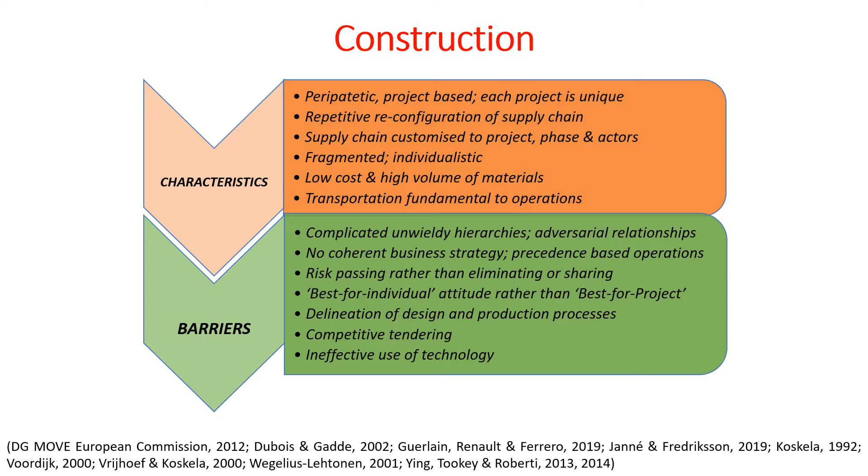The barriers to sector transformation are complicated and unwieldy hierarchies, leading to adversarial relationships, lack of a coherent business strategy, operations being precedence based, the tendency to pass risk rather than eliminate or share it, best-for-individual attitude rather than best-for-project attitude, delineation of the design and production processes, highly competitive tendering, and scarce use of technology. The New Zealand construction sector is isolated from the rest of the world owing to its peculiar geographical location.

It responds comparatively slowly to improved philosophy, resulting in delayed introduction of new ideas. This typically lags UK initiatives by about 8 years. In turn, new initiatives to upgrade construction have major knowledge, understanding, and skills deficits. Its productivity compared to peer domains has not been very encouraging over the last about 30 years.

In April 2019, the Construction Sector Accord was launched between the government and industry leaders, creating a platform for them to work together to meet some of the key challenges, including skills and labor shortages, unclear regulations, lack of coordinated leadership, uncertain pipeline of work, and a culture of shifting risk.

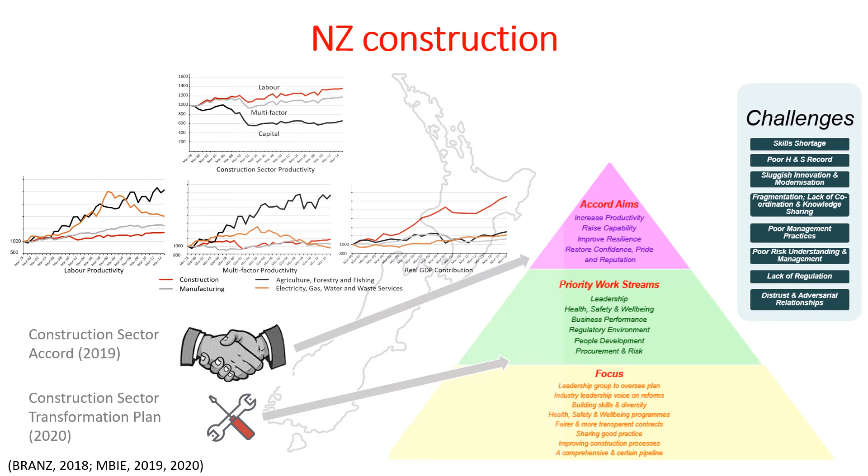This was followed up by a 3-year construction sector transformation plan during January 2020, a blueprint for resolving the sector's long term challenges around risk, overly complex contracts, and skills development.

Construction supply chain management is a system where actors work together to install and utilize information to produce and deliver materials, plant, temporary works, equipment, labor, and other resources for construction projects. It primarily consists of owner, user, architect, consultants, and direct and indirect suppliers or contractors, and focuses on managing the interface between the supply chain and the site, managing the supply chain, transferring activities from the site to the supply chain, and integrated management of both.

It has key considerations ranging from data processing to understanding financial trade-offs at the other end of the spectrum. It is achieved at the operational level through an equitable relationship between actors, whereas at the strategic level, it is based on power relationships.

Logistics plans, implements, and controls the forward and reverse flow and storage of goods, services, and related information between the point of origin and the point of consumption. It is considered a subset of supply chain management, though there are varying opinions. Construction logistics consist of whole projects, supply, and on-site logistics.

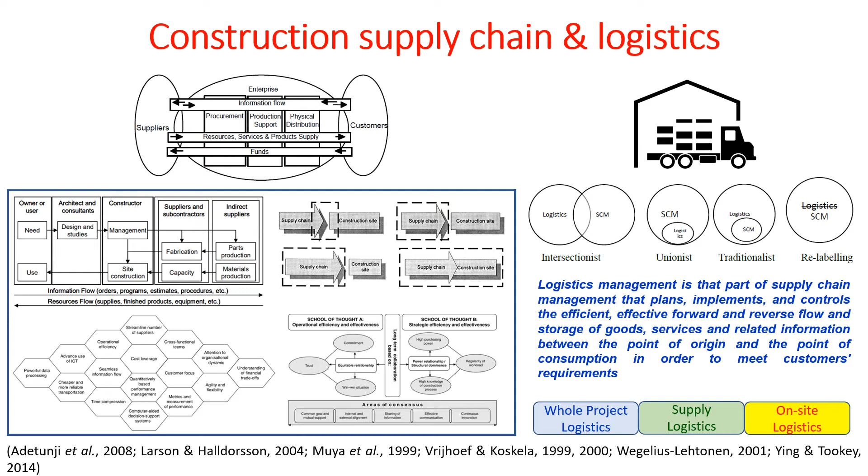The Brundtland Report defines sustainability as development that meets the needs of the present without compromising the ability of future generations to meet their own needs. It is comprised of the natural environment or planet, society or people, and economic performance or profits, referred to as the triple bottom line. Sustainable construction aims to restore and maintain harmony between the natural and built environments, adding value to quality of life by embracing economic and social domains in addition to the environmental domain.

It applies sustainability principles to every stage of the project life cycle, with conscious design to decrease effects on consumption of natural resources and ecological systems. It stands at the cusp of sustainability in processes, use of resources, and application of principles.

New Zealand is a signatory to the Habitat Agenda, therefore commits to bring the impacts of the construction industry into harmony with the environment. Sustainable construction in New Zealand has a three-pronged approach, including government programs such as the Sustainable Development Programme of Action and legislation such as the Resource Management Act, inclusion of sustainability in the corporate agenda by industry coalitions, and knowledge management by professional and academic bodies.

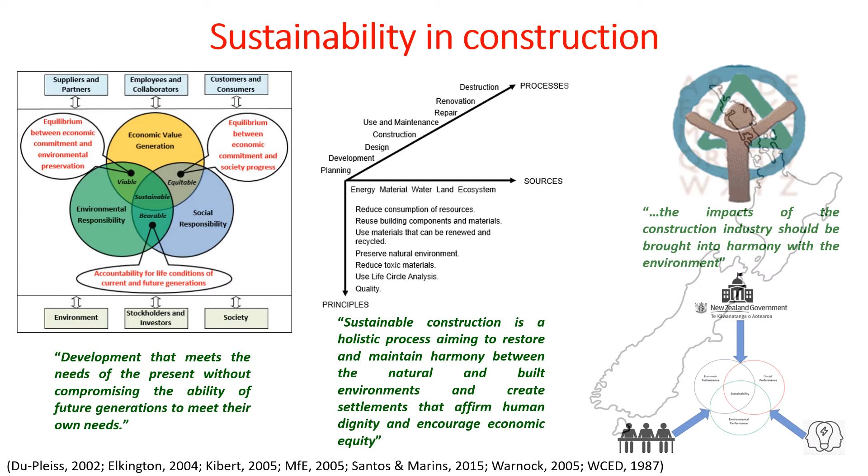Sustainable construction management has many implementation contexts within and outside the construction domain, from governance and strategy through planning, project delivery, supply chain and logistics, operations, end of life, and waste management. It is associated with every stage of the project life cycle, from inception to handover and subsequent use. Implementation attributes are iterative development, early stakeholder involvement, communication, coordination, collaboration, value generation, and waste removal.

Strategies such as the lean project delivery system, integrated project delivery, and agile project management have been adopted from the manufacturing domain. Relational project delivery arrangements have emerged in the construction industry since the 1990s in the form of partnering, alliancing, and integrated delivery. Impact assessment in New Zealand has moved from environmental impact assessment to complete sustainability assessment with tools like sustainable return on investment, economic value added, sustainable value added, and sustainability appraisal.

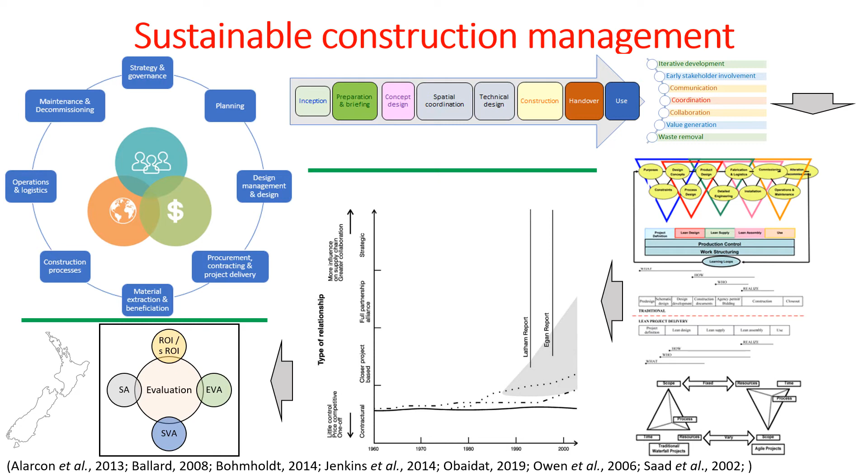Sustainable construction supply chain management is characterized by integration of economic, environmental, and social considerations with key inter-organizational business systems designed to efficiently and effectively manage operational delivery to meet stakeholder requirements and improve profitability, competitiveness, and resilience over the short and long terms. It has multifarious attribute categories associated with each of the three BL dimensions, spanning across performance and parameter efficiencies, profitability and equitable distribution, and social compliance and HR issues.

The basic model revolves around strategic orientation to 3BL and supply chain management, a framework of continuity in relationships and business development, collaboration in strategy and operations, and processes centered around risk management, stakeholder management, innovation, and the life cycle perspective. Logistics at the delivery end are characterized by fewer and shorter movements, lesser handling, better vehicle utilization, and energy efficiency. The New Zealand context, formalized in the Energy Strategy to 2050, agrees with this, with sustainable transport forming the linchpin of operational implementation.

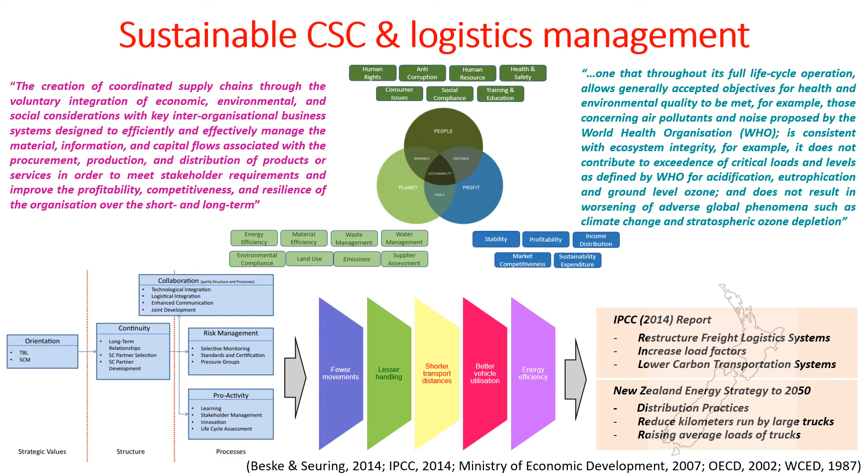Construction material being low cost and high volume, transport is a major component of construction logistics. Estimates show that transport is responsible for nearly half the construction logistics cost, about one-fifth of the construction costs, and almost a tenth of the selling price.

In addition, it is a major energy consumer and significant generator of emissions. Construction transport consumes nearly 40% of urban oil, causes between 16 to 50% of urban pollution, and leads to many times higher fatalities compared to other modes of transport.

Related negative social and environmental impacts are damage to biodiversity, noise, congestion, accident risk, gridlock, adverse public health, to name a few. Effects of transport within and outside the domain are therefore substantial, and optimization can have a major positive contribution in terms of reducing or mitigating negative impacts.

In the New Zealand context, freight transport is a major contributor to the greenhouse gas emissions annually, and negative social and health impacts such as pollution, noise, crashes, and community disruption.

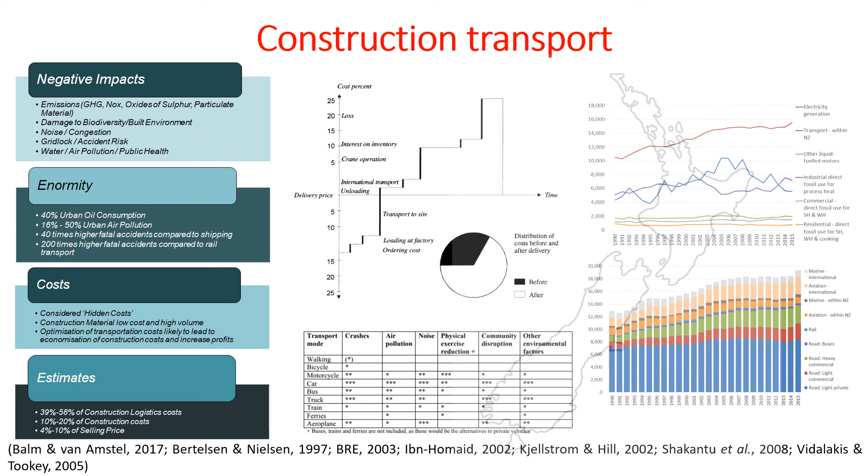The research opportunity has been provided by WaterCare, an Auckland Council owned entity providing water, wastewater, and stormwater services across Auckland. They have recently commenced a program to deliver capital water infrastructure in the Whangaparoa Peninsula under a $2.4 billion contract with their supply chain partners over 10 years.

It adopts program alliancing as opposed to project by project alliancing from the enterprise model of Project 13 of the UK as a strategic infrastructure delivery vehicle. At the operations end, it has adopted the Construction Consolidation Center approach as a logistics solution. Both the initiatives are a first in New Zealand, the portfolio based delivery being a step change in infrastructure procurement.

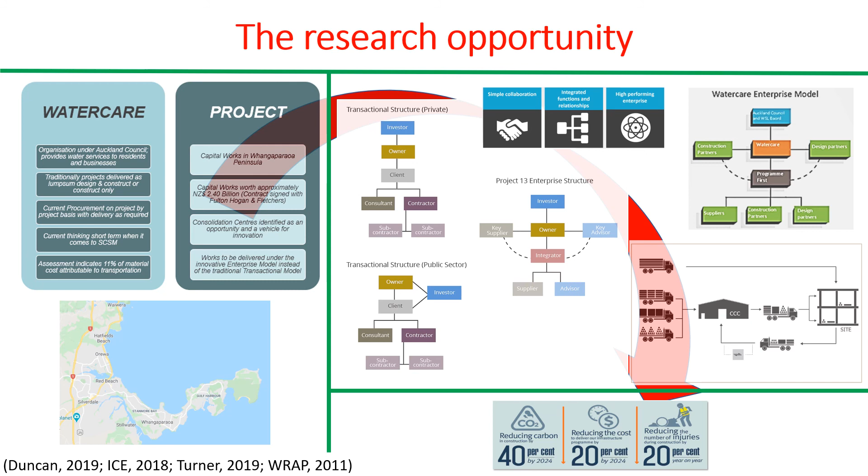Aiming at 40% carbon and 20% cost reduction by 2024 and 20% health and safety improvements year on year, they create a unique contextual research opportunity, permitting performance benchmarking against previous research in Europe, continental USA, and Australia. Research possibilities from a CCC-based logistics solution under collaborative delivery in New Zealand may be many.

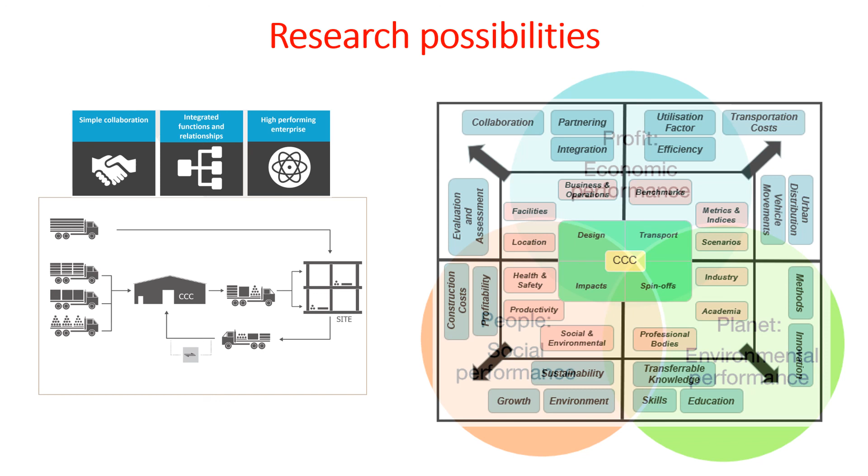With environmental and social considerations taking root in policy and legislation, construction needs to become sustainable. Sustainability implementation initiatives drive transport research within logistics to serious relevance, while a new dimension of collaboration emerges from innovative project delivery. The graphic shows possible research domains, research questions, and outcome possibilities from the center outwards against the 3BL backdrop. These are by no means exhaustive, and many more may be drawn from this unique contextual research opportunity.